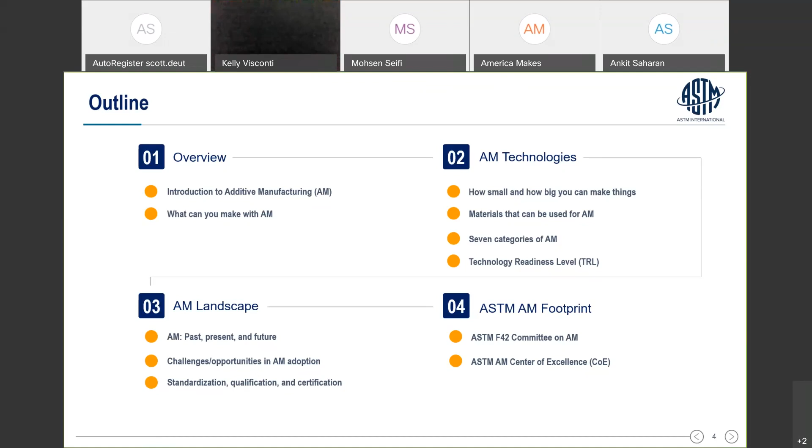I'll then describe a little bit more about the technologies, what are the limitations, what are the advantages, how small we can make things, or how big you can go, and what kind of materials you'll be able to use, and things like that. And then I'll get into some of the landscape and essentially looking at what has happened in the past, where we are today, and what's coming next. And following by providing some input on the challenges and opportunities on the adoption of technology, standardization issues, as well as qualification and certification. I'll end with a brief overview of what ASTM does and what we are trying to accomplish in supporting the industry being able to adopt this technology in a much faster and safer way.

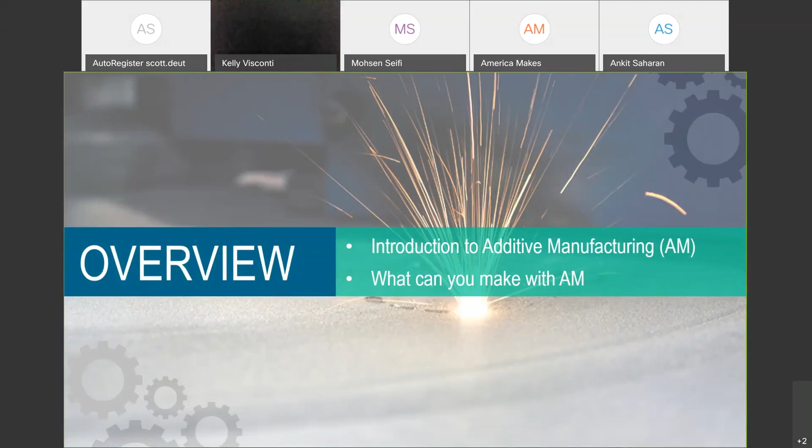So a little bit of introduction about additive technologies in particular. So as you can imagine, this technology is meant to allow you to make objects in 3D. So there are a lot of promises, as you have probably seen, for this technology that enable new business models to be created.

It allows us to make things that are not possible to do in any other way. Essentially, it's a joining technology that makes it possible to print or create objects out of a 3D CAD file. I'll get into that in a second, but essentially, in some ways, it's disrupting the way that we make things because it allows us to design complex geometries, it allows us to reduce weight significantly, and essentially really redefine how

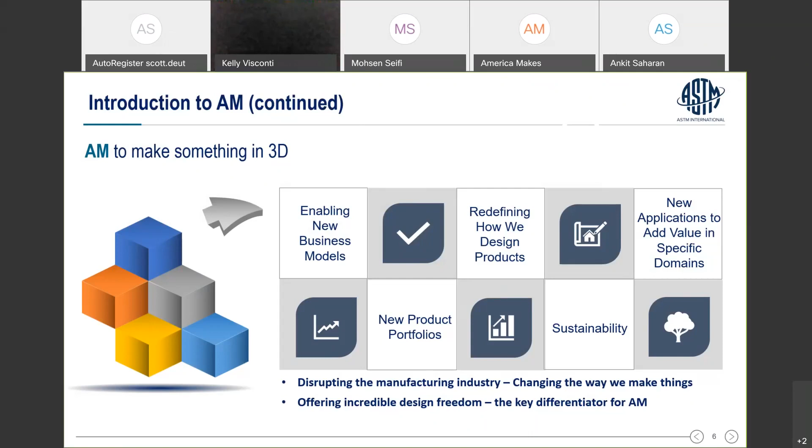we design products. So as a result of this freedom in design, you have new applications, you have new specific areas that you can get into, which you couldn't do in the past. And it can also potentially get us into sustainability mode in a lot of different industries. So essentially, as you can imagine, there are advantages, but there are also limitations.

So the biggest promise of AM technology is allowing you more freedom to design things. But this freedom is not free. It comes at a cost. But also you're able to mass customize a variety of different products in ways that you couldn't do in the past. Reduce time to market, reduce tooling significantly, and also reduce the supply chain and lead time.

In the past, if you were to have long lead time in order to have components arrive at your location or your field, you would need to have a really large supply chain, lots of lead times. But this technology has the potential to significantly reduce that, but also allow you to really reduce the material usage significantly, reduce the scrap rate, buy-to-fly ratios, and things like that.

But at the same time, there are some limitations. As we evolve within this technology and industry, these limitations may evolve too. So at the moment, there are limited materials that you can reliably print. But as I mentioned, this field is constantly changing, new materials are always becoming available. So that's exciting. There is capital cost that is associated with the technology.

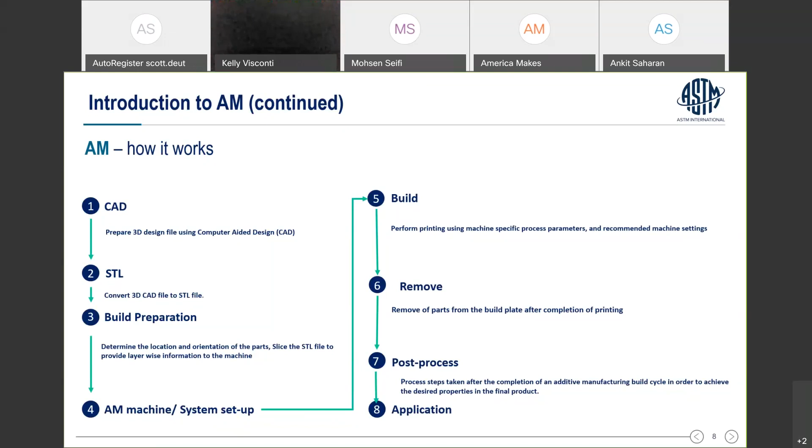And then you go into build preparation to determine the location, orientation of your parts, and so many different characteristics that you can plug into, change different knobs and things like that. Then you get into your machine system setup, building the file, and removal, followed by post-processing in order to make it available for your application. There is a lot going into this. It's not the whole thing, but in a nutshell, that's how AM technologies work.

Now, there are early adopters for this technology. As you can imagine, lots of investment came initially from aviation, aerospace, and defense. So that's why we see numerous applications in those areas, but also in the medical field we've seen applications. I think the first real product that has been certified by FDA goes back over 10 years, right around 2007. And we have over 100 parts that have been certified by FDA that are in

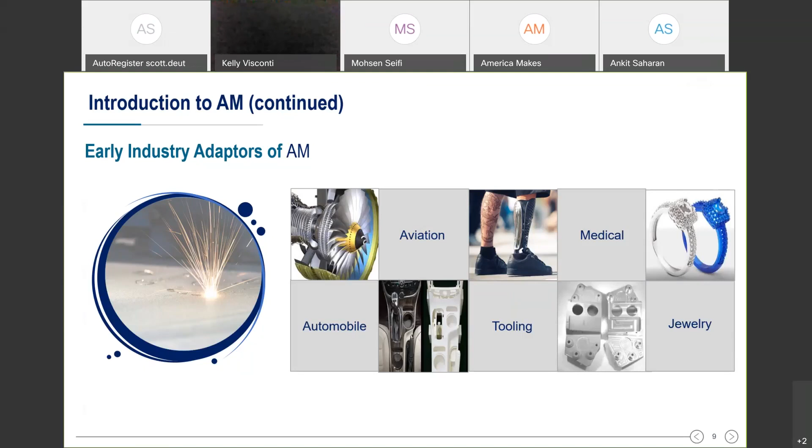use at the moment. But again, it largely depends on your application, the criticality of your application, and where you're going to use this technology. Regulation is involved, and lots of details. But if you look at this, early adopters start with aviation, medical, followed by lots of applications in automotive, oil and gas, and also consumer products and things like that.

Now, the question always comes to mind, how small you can go and how big you can make things. If you look at the next chart, I tried to capture and give you a little bit of a sense of the scale of things that you can make. You can make things really small.

Micromechanical, microelectromechanical systems or gears that can really be functional. You can make those things with a number of AM technologies. You can go all the way to large tanks that are being used in space applications, for example. In between, you will see the maturity of technology over the time, as well as in the length of scale.

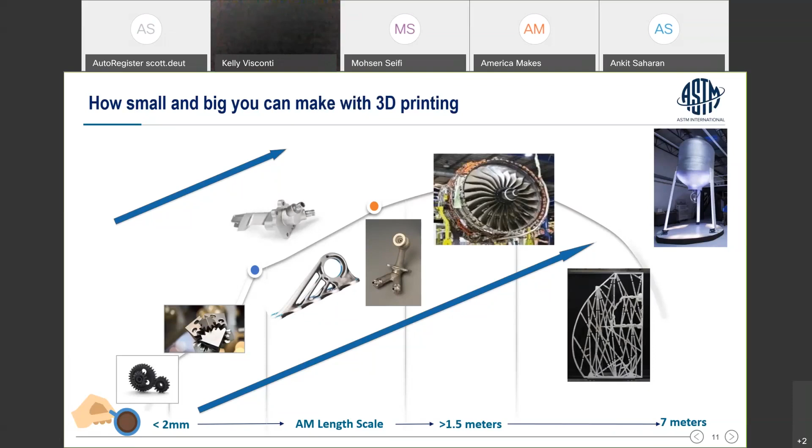And each of these technologies have unique characteristics that separate and differentiate them from the others. Most of the technologies that are out there are considered under one of these categories. Obviously, there are new technologies always coming in, but there are justifications for these 7 categories and how they are being expanded and how we can add new categories, which we can get into in the Q&A. Now, each of these technologies are able to utilize different feedstock, polymers, metals, ceramics predominantly, but depending on which one you look at, there are different limitations as well as opportunities that exist.

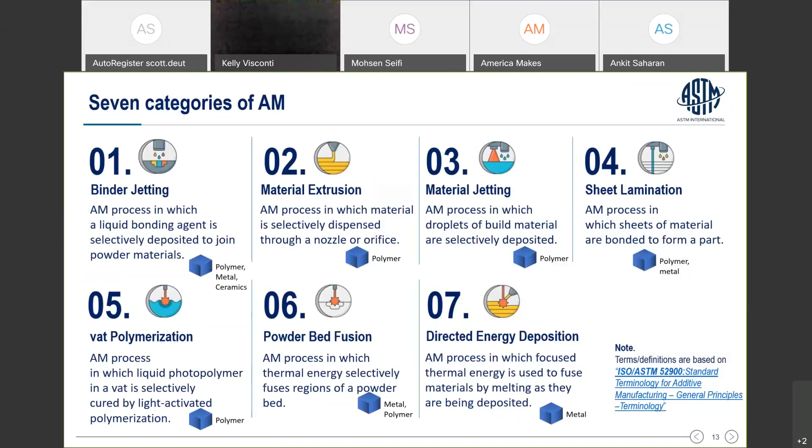Now, moving into technology readiness level, you might ask, where are we with respect to key industry sectors? It all really depends which sector we are talking about and what kinds of applications. This study was conducted a couple of years ago, but we still see the trend. So in aerospace, if you look at the TRL, in general, we are between 5 to 7, but there are organizations that are 9 and 10 on a specific application. It's not really generalized. We can't say, for example, in a highly critical engine component, that we have resolved all the issues. No, there are issues that still require research and innovation.

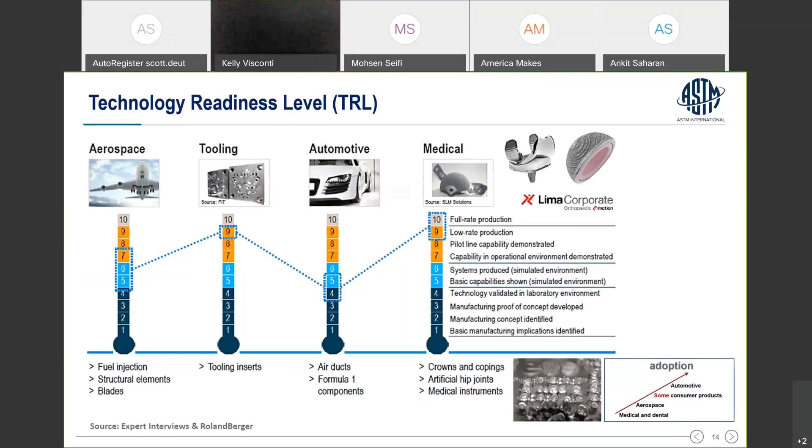So in tooling application, lots of progress, and we are really at a high TRL. In medical, as I mentioned, we've seen a significant amount of progress, and on average we are anywhere between 7 to 10. Again, it totally depends on specific applications that we're talking about, but the trend is still more or less valid. In automotive, we see that there are different requirements, different things that are involved, but that's how we see automotive and transportation.

Now, in general, looking back at the landscape, where we were and where we are today, you can come up with some of the ideas here. In the past, the technology really came at a high cost. And there was a high degree of customization for applications that really promised justification of this cost. There were also challenges in the low quantity print production capabilities. We could not always meet high volume productions, but things are starting to change.

At the moment, we see gradually a reduction in the cost of the technology, equipment cost, capital cost, material cost as well. So it started to really make sense for some of the other industry sectors, for example, transportation, heavy machinery, and others. And we also see a significant increase in the throughput of the machines. The cost of lasers has gone down, and we see the birth of multi-laser systems in order to increase productivity. And the market tends towards a high mix of low volume provides further justification. Now, in the future, what will really allow us to significantly increase the adoption of this technology is bringing trust into this technology.

And one of the ways to bring your trust into technology is a standard, essentially. And being able to meet the regulations, being able to satisfy regulatory requirements, I think really makes this technology much more viable. It can reduce significantly the supply chain, and it becomes very useful for on-demand applications and beyond.

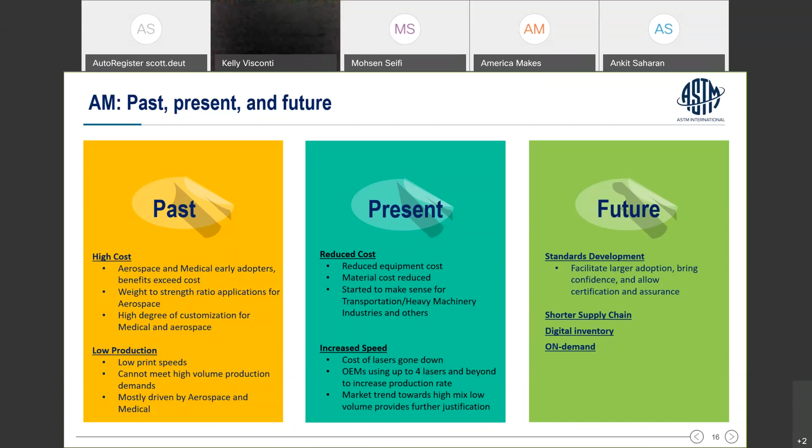Now, in addition to that, there are some challenges and opportunities I would like to highlight here. In terms of technical challenges, again, this depends on the application and which sector you're looking at. Lack of talent and the current expertise is quite evident. There's lack of awareness and understanding on when to use AM. If you can make something with AM, that doesn't mean you have to do it. Using additive technology really requires justification.

And also, as I mentioned in the past, printer speeds and the speed of technology is still a challenge. AM OEMs are always working on it. Uncertainty on the quality of the final part, repeatability of the process. Those are some of the other challenges that we still see on the technical side. As I indicated, lack of regulations and standards, that's quite evident.

On the commercial side, again, cost is a huge driver. We have to start with identifying a business case. If economically it makes sense, we definitely can justify the use of this technology. There are lots of intellectual property issues and protection around the technology. Export control is a huge topic right now as well.

How do we really make sure that technology becomes safe, and the investment that we are putting in, especially in the defense organizations, really maintains within us? Insurance cost, and the need of really a change in the mindset. We have to think differently if we really want to utilize this technology in a safer way.

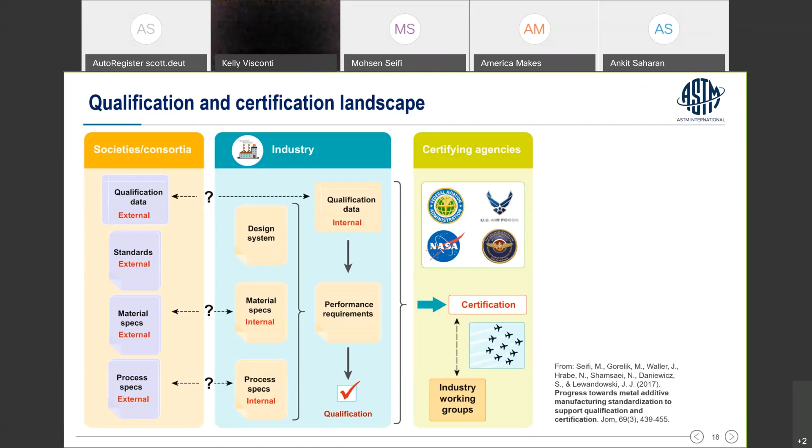So standards now can be a huge enabler and help in order to get you to certification and regulatory acceptance. Standards can ensure your process control, can ensure that your quality is consistent, can reduce the risk of investment, can also reduce the cost, facilitate trade and larger adoption, and get you to certification and assurance. That's why a number of organizations are involved in the standard development processes in order to really ease the way towards qualification, certification, and regulatory acceptance.

Now, the last part of this quick presentation is about ASTM and how we can help support the AM ecosystem. ASTM has been around for over 120 years. We create standards. We are a standard developer for over 90 industry sectors. We have 150 committees, over 12,500 standards covering a variety of industry sectors. Our presence is global. We have operations in a variety of different countries. Our standards are being used all around the world. According to the World Trade Organization, we are within the process compliance of principles of the WTO.

So what really makes us unique is the process. It's an industry-driven process, market-based, consensus-based, and also voluntary. That means you can participate in this process regardless of the type of your organization. Your vote can count towards development of standards, essentially.

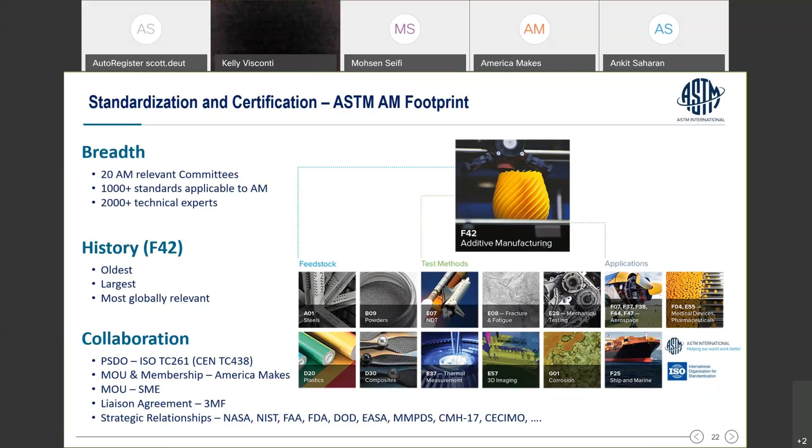Now, as I mentioned, this committee in particular, established in 2009, has over 800 members involved, technical experts. We've created over 20 standards, 40 plus in development. We meet twice a year. Our last meeting, in fact, was in Paris. The next meeting will be in Texas, El Paso at University of Texas. There are a number of subcommittees involved and focus areas ranging from testing methodologies, design and data, materials and processes, environmental health and safety, and also application-based standards. Over 30 countries are also involved in this development.

Now, we know that standardization in general is not fast because you need to bring the community up to speed, up to the same page as well as into consensus. Because of that, it takes time. But also there's always challenges in these emerging technology areas, availability of research and data that can allow us to put together standards. In order to resolve that, ASTM supported establishment of a center of excellence. This center is committed to support creation of globally accepted standards, but also contributes to education and workforce development and supporting the next generation of AM professionals.

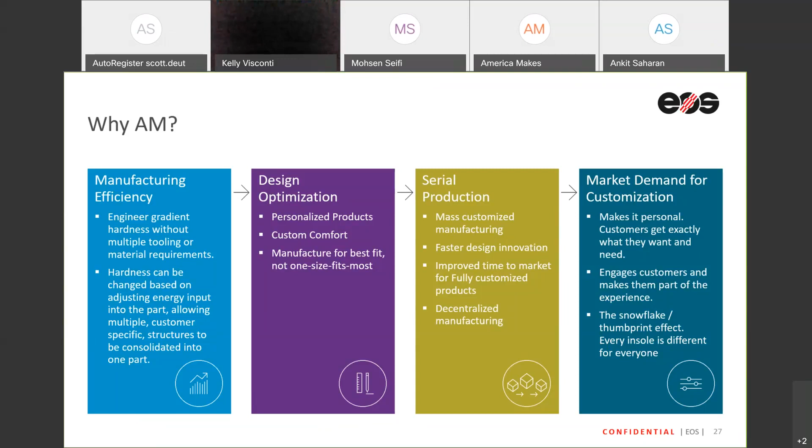But one thing that is very important to understand is that it's very easy to fall into the trap of comparing metal binder jet to laser melting, or comparing direct energy deposition to electron beam melting. It has to be understood that every technology is basically dependent on every application. An application which is suitable for direct energy deposition might not be suitable for binder jetting, or the application which is suitable for laser melting might not be suitable for electron beam melting. And what we want to basically say is that the choice of the technology is essentially dependent on the applications that are at hand.

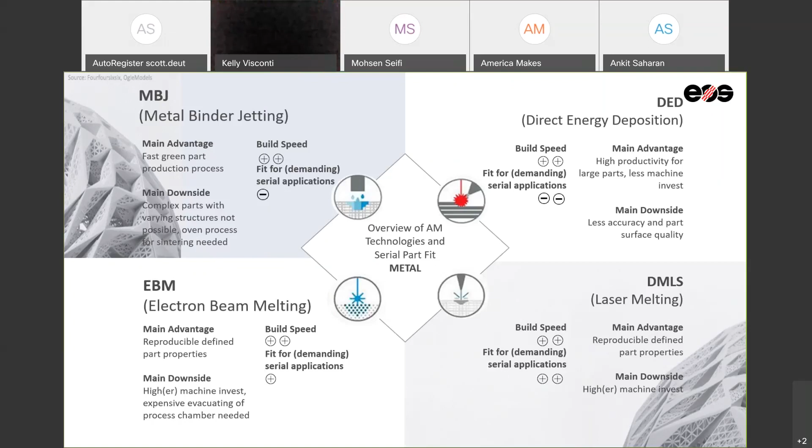But the quintessential idea that we talk about with additive manufacturing is basically that it gives the power of individuality, it gives the idea to basically transform any idea to a reality. Not only from an engineering or a technical standpoint, but also from a strategic standpoint, by creating new business models. Most people say that additive manufacturing disrupts supply chain. I personally think it doesn't disrupt existing supply chains. It basically makes them more robust. It strengthens your supply chain. It reduces your risk, and it's basically an additional tool in your toolbox, which you can use to make your ideas into reality.

But if I just focus on the laser part really quickly, all we do is basically create parts from light, which is laser, sand, which could be metal or polymer powder, and basically thin air, which could be argon or nitrogen or inert atmosphere for laser machines, or vacuum for electron machines. But the idea is that the education and the skill we need to train our engineers for is one of the essential facts that gives power to the idea of additive manufacturing. It not only enables transformation of people, but it basically changes the way people think and creates endless possibilities to change how we work, how we live.

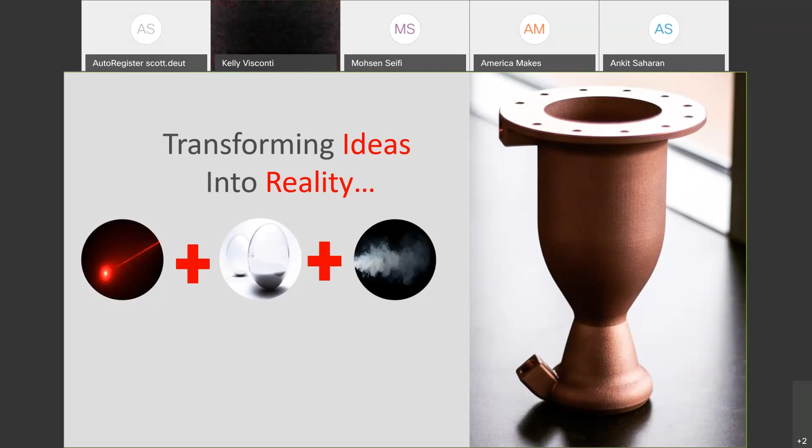But that's what the power is: the more application and innovative parts are made, the more we can actually go after targeting these applications. And if I'm looking at the shifting in the production chain, instead of creating one part over and over again, it gives you the flexibility of making different parts at different times. Your production runs can go smaller, and it can actually be more economic. So the cost of your production run is no longer dependent on how many parts you're making. You can go to distributed manufacturing instead of one central hub where all the parts are manufactured, to different places over the globe, and have truly on-demand manufacturing.

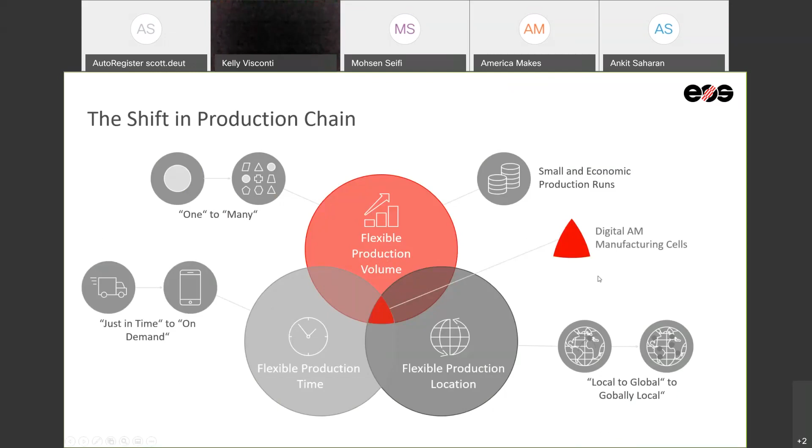Now, the intersection of all this is something we call a digital manufacturing cell, and this is something we strive to have in our customer base, and we hope they can adopt someday. Now, if we look at the advances in aerospace, airplanes have come far. We have come from biplanes to turbofans, the engines that power most of the commercial flight today. However, most airplane makers want to make their parts lighter and save on fuel costs to make commercial aviation more sustainable.

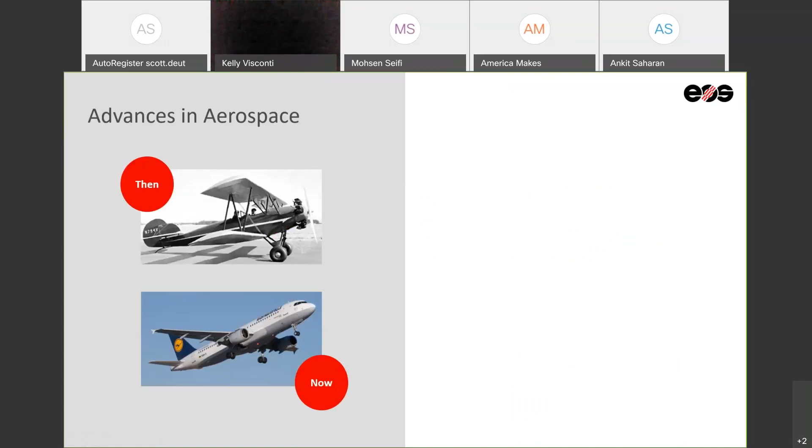So if we look at just one part, this is an Airbus A320 nacelle hinge that was made in a conventional way. From a 3D printed standpoint, we can create a completely topology optimized bracket, a hinge that is about 35% lighter and reduces the assembly from 10 or 15 components to just one single part. That brings a lot of savings in fuel and to sustainability programs. And this is just one part. Imagine you've got millions of parts in an aircraft. Imagine if it's applied to even 10 or 20% of the parts in an aircraft. That's going to bring huge cost savings to the industry.

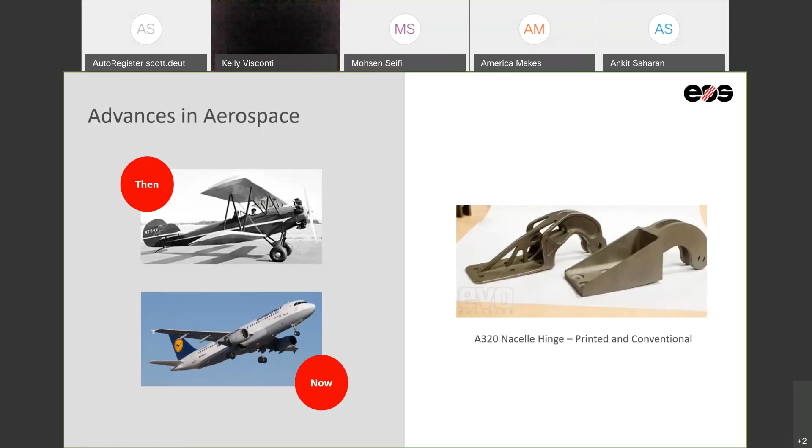And from a product validation standpoint, this is an example we went through where a business model can be created in a very short time scale. In this case, a customer scan can easily be done, converted into a CAD file, converted into a 3D STL and printed in a machine. And all of these parts could be made for every person specifically. So it's an excellent example of mass customization that's possible.

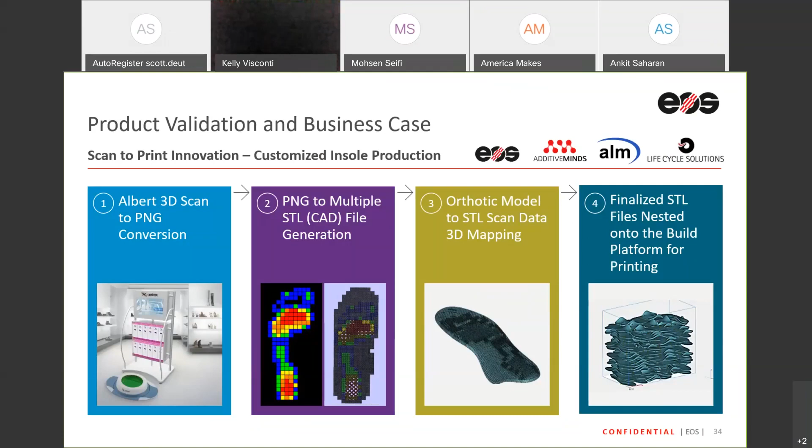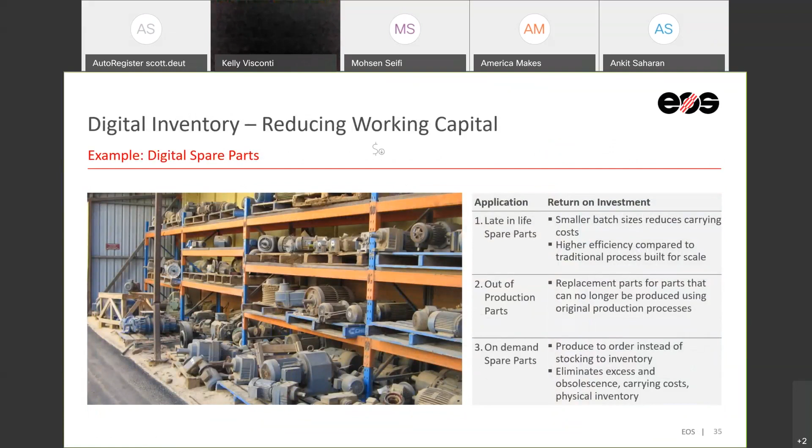Not only that, if we work towards digital inventory or digital spare parts, like I said earlier, we need not maintain huge inventories of parts and huge brick and mortar stores. We can create digital inventories that help us reduce costs and reduce the parts on hand. It's going to help us reduce a lot of shipping costs as well as moving parts from one place to another.

Now, the question we are always asked is, if this is the state of the art, what does the future of the technology hold? That's a very difficult question to answer because this technology is evolving rapidly. We can only predict about a 1 to 2 year time frame. What this technology is going to look like in 5 to 10 years, we really don't know. For example, about 15 years ago in laser powder bed fusion, there were only a handful of companies, 4 or 5, in the world making machines of this technology. But as of today, I counted this morning about 25 different OEMs making machines for this specific technology. So we're seeing an explosion of growth and options for customers to choose from. But when we talk about the future, it's essentially 3 parts.

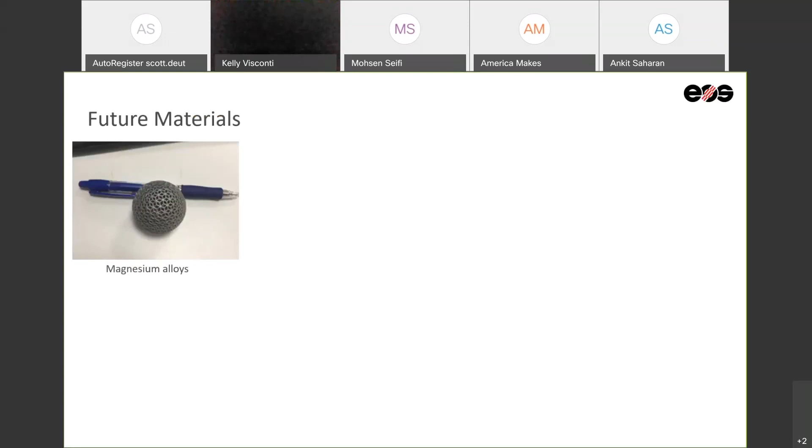One is from a materials and processes standpoint, where we're talking about high-strength aluminums, metal matrix composites, whether we're talking about more lightweight alloys or functional alloys like high-entropy alloys or bulk metallic glasses. That basically changes the game and creates more applications. So in the future we could see magnesium alloys come to the market. We could have bronze come back into the market, Invar 36 for satellite and other applications, copper.

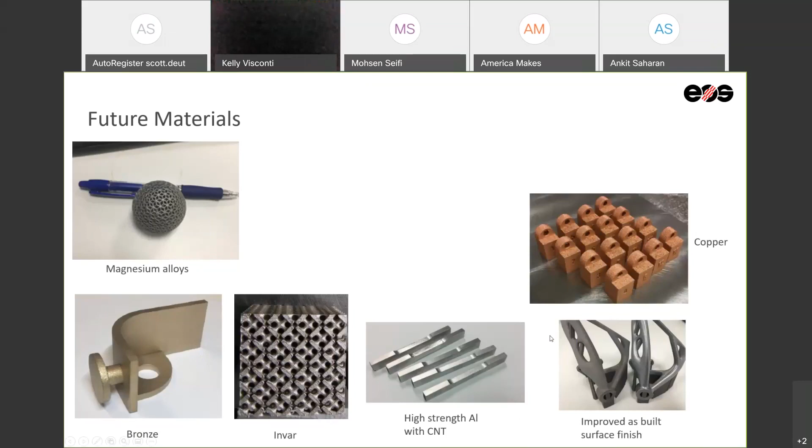We can even have improved surface finishes of existing parts, and even more far-away research where we start to incorporate nanotechnology into additive manufacturing, by having carbon nanotubes embedded into an aluminum matrix to create a unique part with a different high strength. But most of these alloys we talk about are existing alloys. The true form lies in an alloy which doesn't exist today, that truly goes after the advantages of this technology. And this is something that we truly feel is going to change the game.

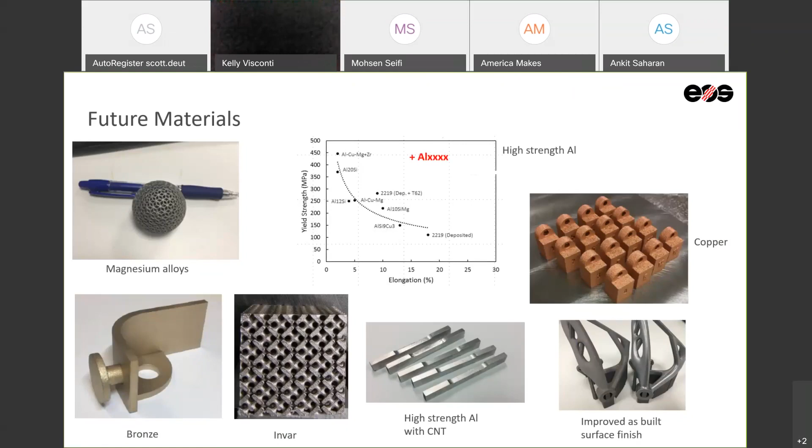And there's research going on across OEMs and universities into creating a number of these alloys. Not only in aluminum, but coppers, duplex steels, even nickel and cobalt chromium superalloys. Now on the machine side, this is an example of a meter-sized part coming to the fore. The company, called Launcher, was able to print this part.

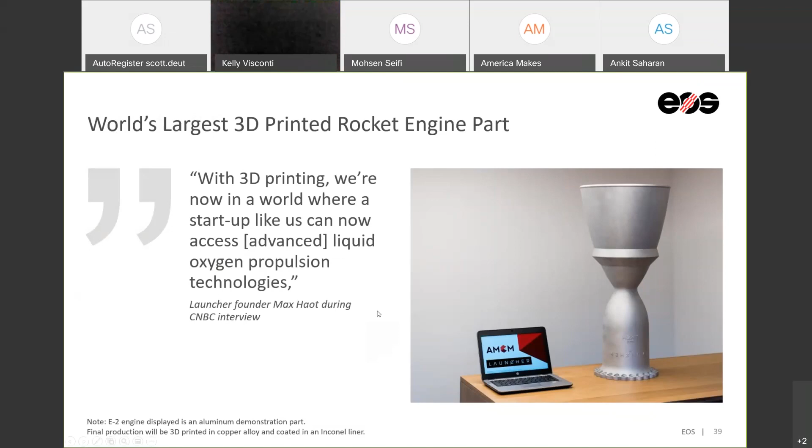Now we're talking about scaling in size of the machine, whether in terms of lasers or efficient beam delivery or efficient energy delivery systems, so we can make the parts not only faster, but bigger and better. That's one of the existing advantages of this technology, a trend we see in the near term. But the good thing is that this technology, like I said, is a tool in your toolbox, and the good thing comes when you can combine it with an existing technology,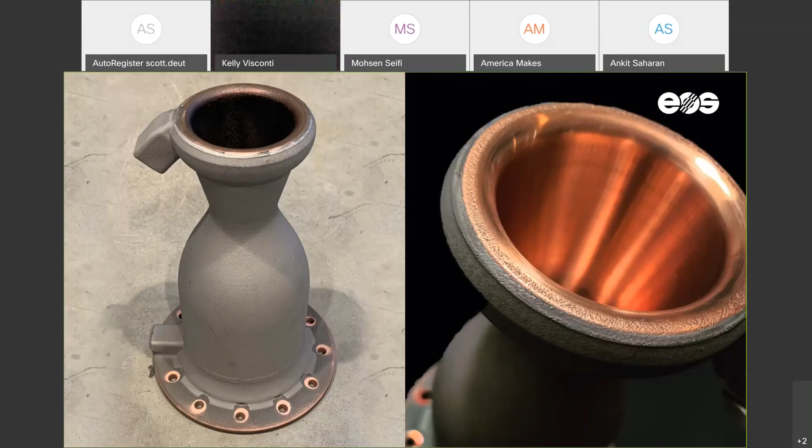like a conventional one. So in this case, that same Launcher nozzle that was printed in copper was sprayed with Inconel 718 to form a bimetal jacket around it to have an excellent cooling part. This not only doubled the efficiency, but created a part in this class like no other. No other part can achieve the efficiency of the thrust that this part can. So this is an excellent case where we combine additive with a conventional form of manufacturing to create something truly unique.

And if we're talking about the future, we cannot forget the software part, which is going to make this all happen, where additive manufacturing machines talk to subtractive manufacturing machines to form an interconnected network that can talk to each other. So you can create a digital inventory of parts where you design the part in the US, but print the part out in the field somewhere in Australia or Japan where it's actually needed, while maintaining the data security of the parts as well.

We're talking about data analytics, about how an incident at one side of your machine can predict how it's going to go on the other side. So it's connected manufacturing that we're going after from the software side, which we see is going to impact a lot the adoption of this industry. So with that, I want to end my presentation, and I'm happy to take questions towards the end. Thank you very much.

Thank you, Dr. Saharan. That's very good information. So for those attendees, we heard from ASTM as an organization that's establishing standards and providing education and workforce development, and the need for standardization as we adopt these new technologies. We heard from one of our industry partners that supplies that technology to the marketplace. And we're going to hear now from Kasia Witkowski from HP, another industry partner and technology provider.

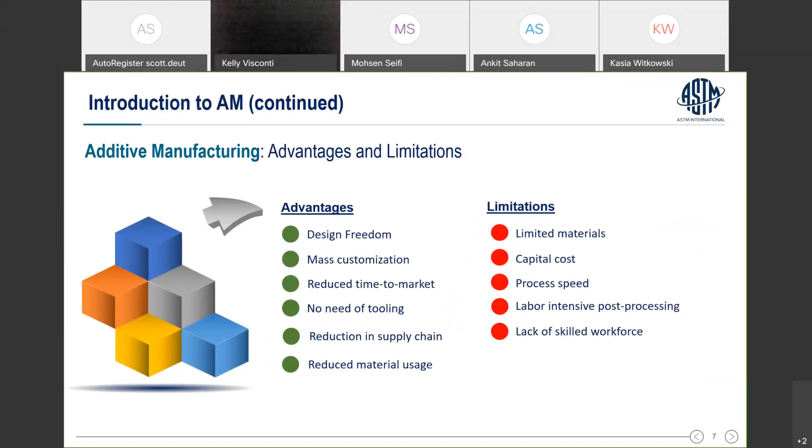So it looks like we're just getting the... yeah, technical difficulties here. Oh, and I think we're running a little long, so I'll try to be short and sweet so we allow for questions. Yes, I know Kasia's got a quick stop at 2 o'clock, but please, if you have questions, we will get them answered. So Kasia, if you're ready, I'll leave it to you. Yep, I think we're waiting. Somebody's skipping ahead in slides here. Yeah, it looks... my section.

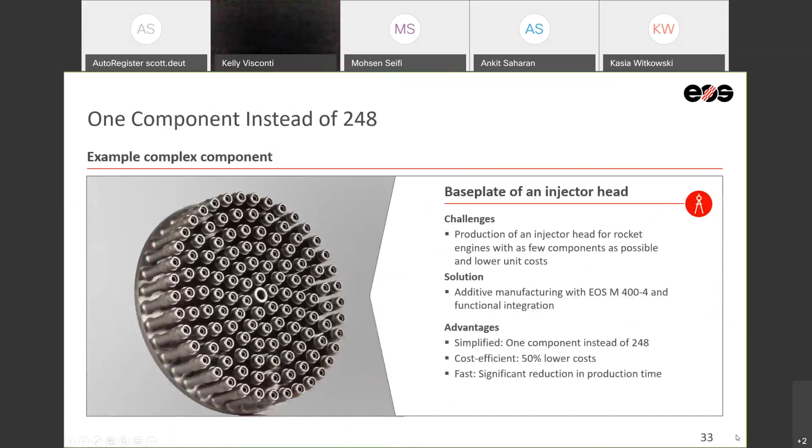So since HP has only started investing in additive manufacturing since 2015, I wanted to take a minute to update you on where your favorite U.S. computer and printer company plays in the additive space. And so HP's multi-jet fusion portfolio of 3D print solutions, oh, here we go.

So the question is, do I have control? Do you have it? There we go. Okay, great.

Okay, perfect. So again, we use multi-jet fusion, and our portfolio allows for prototyping, production. We're in plastics and metals, and it's seeing strong consumer adoption across numerous industries, including transportation, medical, and consumer. In fact, more than 10 million parts were produced on HP multi-jet fusion machines in the last 12 months alone.

So we've also established the HP Digital Manufacturing Network, which is a global community of HP production partners with the capabilities to help design, produce, and deliver both plastic and metal parts at scale, leveraging our 3D print solutions. So many companies look to the digital manufacturing service providers to help speed development of new products, shorten time to market, create leaner supply chains, and reduce their carbon footprint.

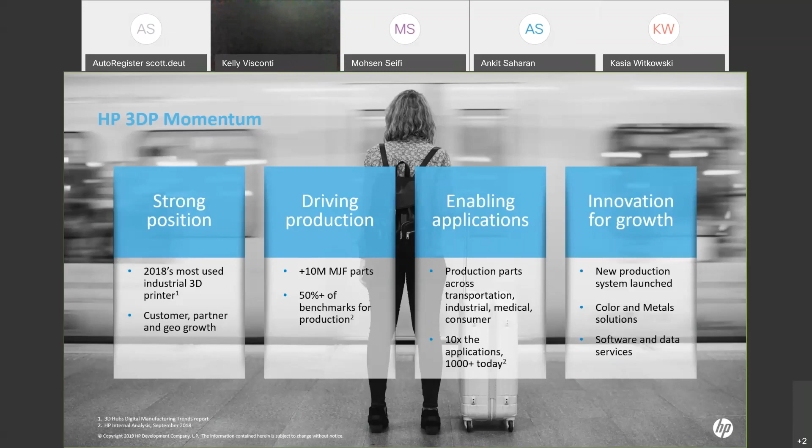So we believe the network is a critical first step to integrate disruptive 3D printing solutions into an organized supply and demand ecosystem, but it must factor standards, regulations, and robust quality management to help industry pioneers embark on their digital transformation journey. So what we wanted to talk about today are sort of the technical challenges, right?

My peers have focused on what's been done to prove the value of additive manufacturing, but now we have to talk about what needs to be done, and I know both of them touched on them, but I think before we step into that technical work, it's important to realize that these achievements can't be reached by one part of the additive manufacturing ecosystem, so government, industry, and academia have to work together for true success.

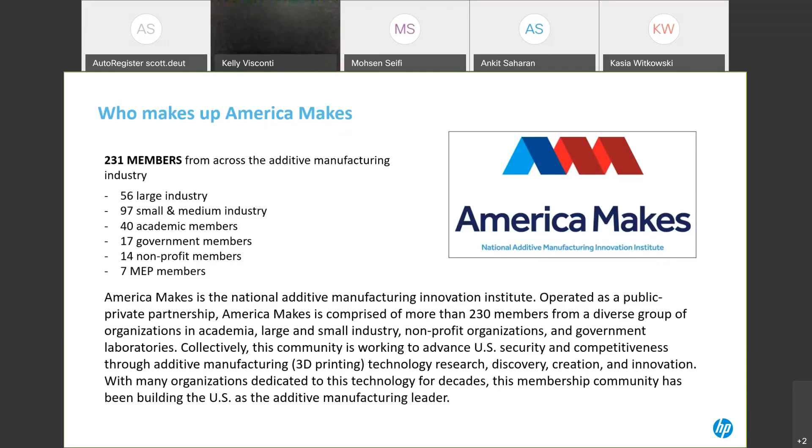And this is part of the reason why America Makes is so powerful. They have the ability to convene all of these parts and to make sure that U.S. additive manufacturing remains on the forefront of the world's work. So just quickly, for those of you who may not be familiar with America Makes, there's over 230 members, and that's made up of large industries, small and medium size, 40 different academic institutions, 17 government entities, 14 nonprofits, and then 7 manufacturing extension partnerships. So a pretty robust system.

So now that we have a sense of the players that are key to success, let's talk a bit about a few of the technical challenges which we still have to work through. The one point I do want you to remember after this presentation, though, is while there is still work to do for full adoption, we have many talented individuals and organizations and governments working to help ensure that an additive manufacturing system factors in standards, regulations, and robust quality management. No one is looking to skip that step. It's just as Mohsen mentioned earlier, standards and qualifications are just sort of a slow process is how we work, but we're all here dedicated to move it forward.

So 3 of the topics I just want to briefly touch on are standards, workforce, and then potential legislative or regulatory constraints. And so keep in mind, each of these topics could easily be a 60-minute presentation on their own and cover the breadth of the work, but today is just meant to give you sort of a brief moment to whet your appetite on the issue, and America Makes, I believe, is going to do some follow-up conversations on this in the future.

So the first component that we're going to look at are standards. And luckily, America Makes has created an advisory group of those over 230 members to focus on standards. Now, they as an advisory group aren't writing the technical standards, but they're coordinating with the appropriate entities and working to ensure everybody's looking at sort of the long-term strategy, big picture, and that there's no duplication. They have, however, identified a few technical areas where they think work needs to be done. That's in design, process and materials, qualification and certification, non-destructive evaluation, and maintenance and repair.

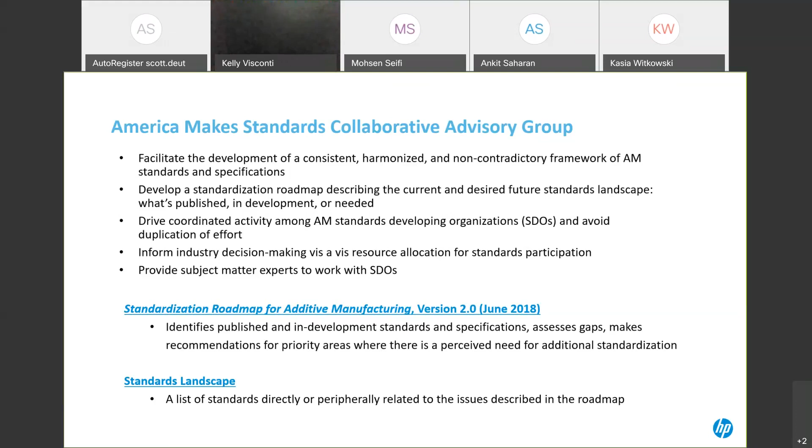But I want to point out the roadmap that is sort of a timeline and strategy for the development of these critical standards. So if you're interested in learning more, that's a great place to start. And then the second piece is the standards landscape, which shows you current standards and how they relate to sort of the full adoption of the roadmap. So again, it's really great that America Makes is focused and has created this advisory group to really move things

forward. The second piece is workforce and education. So as both of my peers mentioned earlier, we need to ensure that there is a workforce prepared with the skills for additive manufacturing. And the answer is right now, unfortunately, it is not prepared for that. But again, America Makes has pulled together a great advisory group of its membership to focus on some very important issues to really take individual projects and best practices and bring them to scale. So while they do a lot of work, there's 4 different examples we'll touch on here.

The first is validating existing requirements and creating new ones where needed. So America Makes has worked with a couple of other entities and done the advanced curriculum in additive design, engineering, and manufacturing innovation. We're very good at small acronyms here. And it's a comprehensive set of immersive training experiences with advanced additive manufacturing curriculum. It's delivered in an intense hands-on environment, and it's integrating skills from multiple disciplines employed in design for additive manufacturing

processes. The second step is promoting and updating credentialing programs. What's most important for all of these is when an employer is looking to either hire a new employee or train and get their current employees to a certain certification set, we want to ensure they know who they're hiring and what the skill sets are that they bring. So they're very focused in that area.

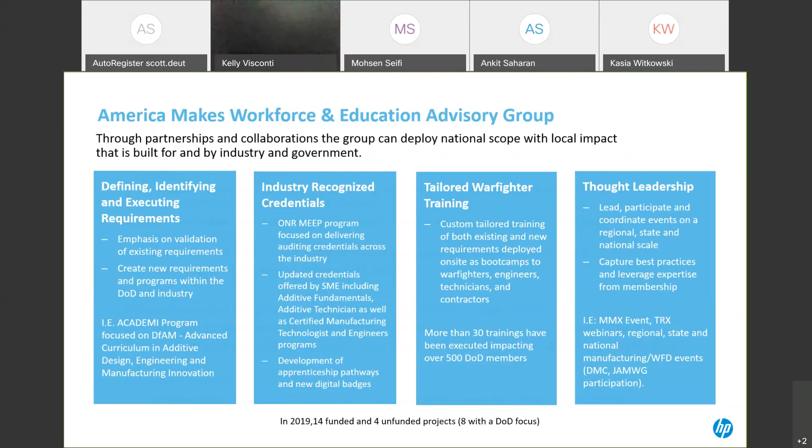is ready for this. And then I think the last piece where the advisory group is strong is bringing together opportunities to promote and convene people who have the expertise and the best practices, again, to bring those to scale from small individual programs that one individual or one academic institution might be working on, but really bring them forward and to scale for the broader good.

So the one last piece we did want to touch on is the worry of some legislative or regulatory changes that could hinder the U.S. additive manufacturing industry. And so please do not misunderstand this. We understand the critical importance that government holds to ensure national security and not allowing bad actors across the globe to access vital technology. We do not question that premise whatsoever. But what this advisory group at America Makes, the Government Relations Advisory Group, their key role here is to ensure that companies and technologies aren't stifled by unintended consequences that would remove the U.S. as a world leader to these most critical technologies that really keep us ahead.

So one example we wanted to share with you is something the America Makes Government Relations Advisory Group had been tracking. In 2018, the U.S. Department of Commerce's Bureau of Industry and Security put out a proposed rule regarding potential new export controls on emerging technologies. They named 14 different technologies. Additive manufacturing was one of those. And so knowing that if these controls were too broad in the final copy of this regulation, this could have detrimental impacts across the entire industry.